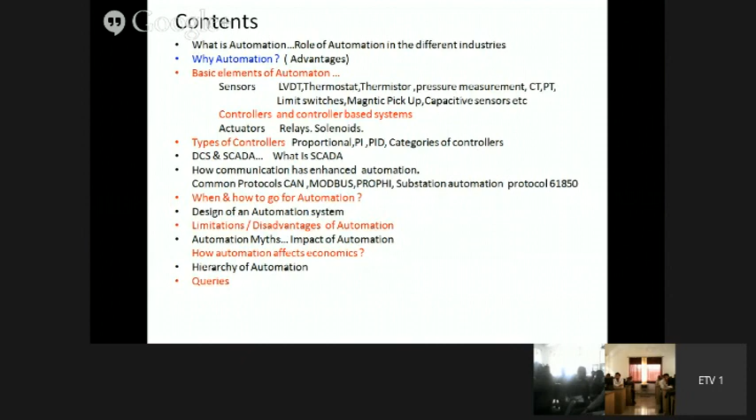Let us elaborate. First of all, I'd like to define what is automation. The dictionary meaning defines automation as the technique of making an apparatus, a process or a system operate automatically. When there is a system or process and it works automatically, we say it is automation.

The American system of definition - the Automation Federation defines automation as the creation and application of technology to monitor and control the production and delivery of products and services. This is the Automation Federation of America's definition.

Automation means use of available technologies to reduce the need of human efforts. Automation is a step beyond mechanization - not mechanization, but a step beyond it. Mechanization provides human operators machinery to assist them with the muscular requirements of work, while automation greatly decreases the need for human sensory and mental requirements as well. So this is, in a nutshell, the definition of automation.

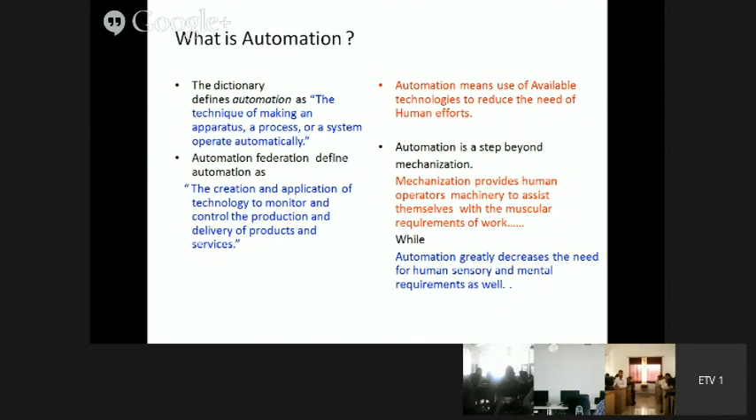So this is automation. Suppose the plant is not automated, if you want to increase productivity and quality, manpower also has to be increased. But in automation, quality and productivity will increase while manpower cost decreases. This is, in a nutshell, automation and its objectives.

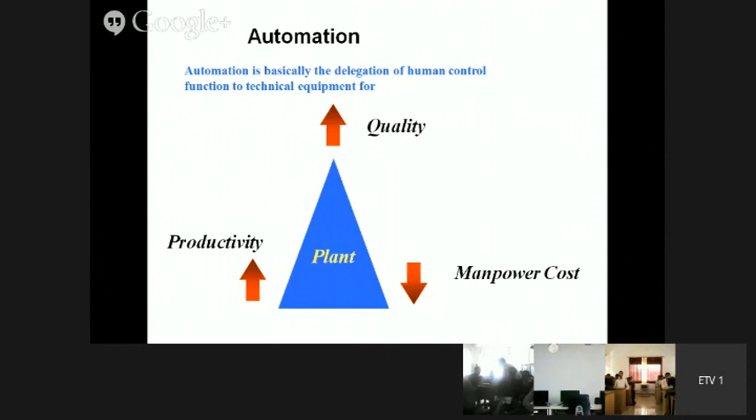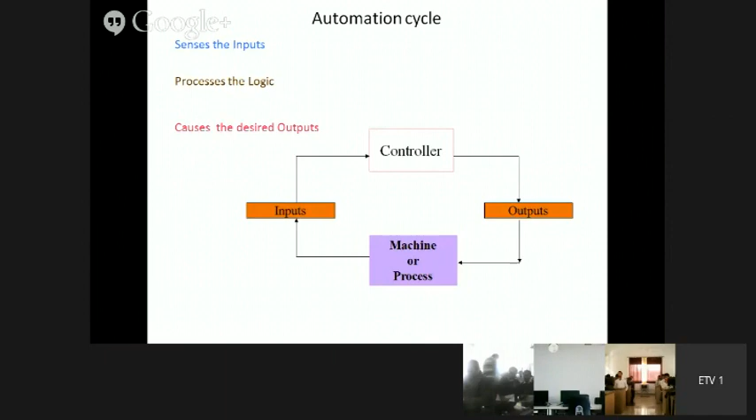Let us see a little bit of history of automation: the ancient world versus the modern world. Of course, you can coin your own words, but to some extent I have tried to put them in order to show what automation history was in the ancient world and how the modern world has taken automation into its application.

In the ancient world, we have manual control, pneumatic control, hard-wired logic control, electronic control using logic gates, process instrumentation, etc.

But in modern control, which is nothing but automation, we have programmable logic controllers, microcontroller-based embedded controllers, clusters of controllers, master controllers at remote locations, and intelligent instrumentation. This is, in a nutshell, the history given for automation.

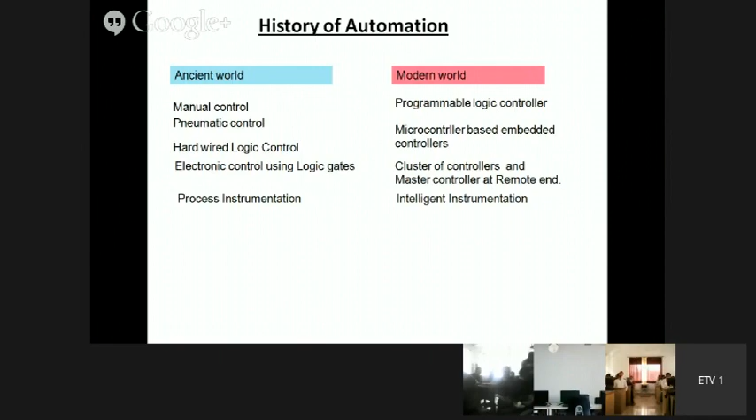We have now entered the 21st century, out of which the last 20 years belong to the communication and information era. This is a very important point, because in the last 20 years we have been working very intensively in the field of communication and information.

If you look at the ancient world, what are the examples? There are inventions that go back to the ancient world, and then came the discoveries of various metals.

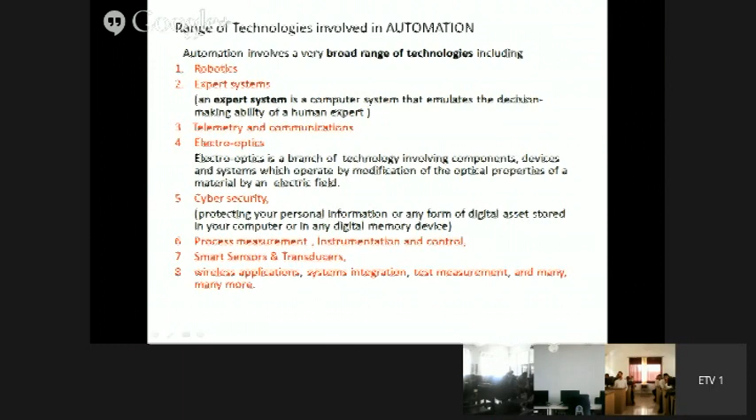Application of automation. Automation encompasses many vital elements, systems, and job functions: manufacturing, transportation, utilities, defense, facility operations, etc., and many others. So these are some of the applications of automation.

Automation can be said to be everywhere. It is present everywhere now, in all functions and places.

We have aerospace, automotive, chemical and petroleum, computer technology, construction and design, electro-optics, environmental, food and pharmaceuticals, glass and ceramics, management, marketing and sales, mining and metals, nuclear, power distribution, process measurement and control, pulp and paper, robots and expert systems, safety, sensor technology, systems integration, telemetry and communications, test measurement, textiles, water and wastewater, and wireless applications.

I don't think any sphere is left in the field of automation. It has touched every sphere of this world and has come into almost every day-to-day life. So we can see the significance and importance of automation.

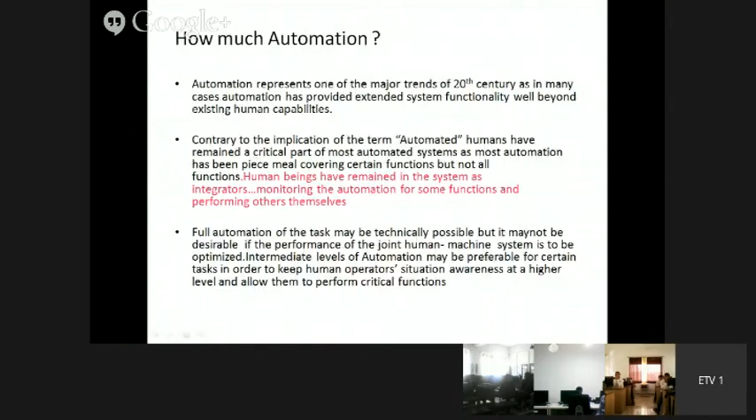Contrary to the implication of the term automated, humans have remained a critical part of most automated systems, as most automation has been piecemeal, covering certain functions but not all. Human beings have remained in the system as integrators, monitoring automation for some functions and performing others themselves.

Here I would like to quote an example of automation in medical sciences, and the latest one is surgery. Now you have robots carrying out very critical and complex surgeries like brain surgery, heart surgery, bypass, etc., and they are doing it very efficiently also.

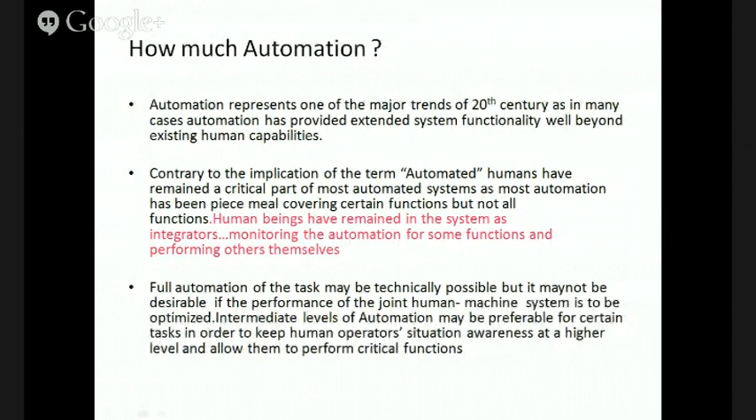But even then, a robot may be costing crores of rupees to perform that operation. A team of doctors still need to be there, because it's a very critical operation being carried out by a robot. So there is always a team of doctors who monitor what is happening. This is one example.

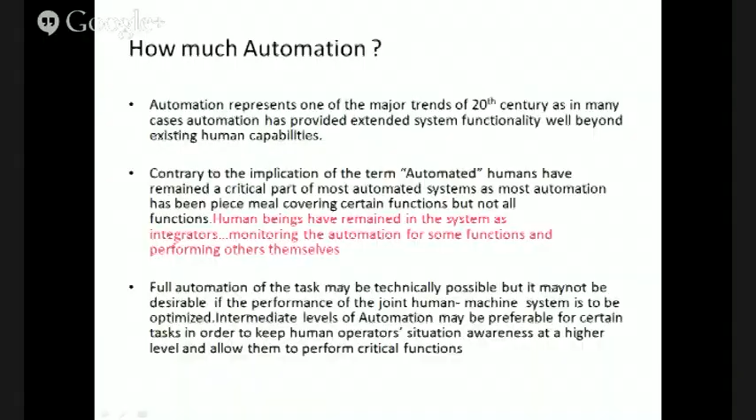Then there is another example - robots have also done wonders in the area of automobiles. Take the example of our Indian Maruti. I have personally visited Maruti Udyog in Gurgaon, where they use robots that can perform 8 to 10 operations simultaneously, one by one, in a total automatic process.

And in their unit in Japan, they can change the head also, and do some different processes. So this is the level of automation which has come into the picture.

Full automation of the work task may be technically possible, but it may not be desirable if the performance of the joint human-machine system is to be optimized. Intermediate levels of automation may be preferable for certain tasks, in order to keep human operators' situation awareness at a higher level and allow them to perform critical functions. It's the same as the example I gave of surgery being carried out by a robot.

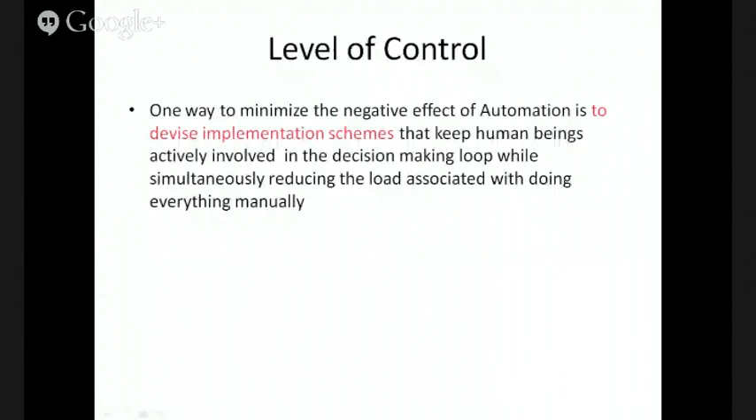Level of control: one way to minimize the negative effect of automation is to devise implementation schemes that keep human beings actively involved in the decision-making loop, while simultaneously reducing the load associated with doing everything manually. Whenever you have the human touch in it, implementation schemes will definitely improve the automation system, while still retaining that human touch.

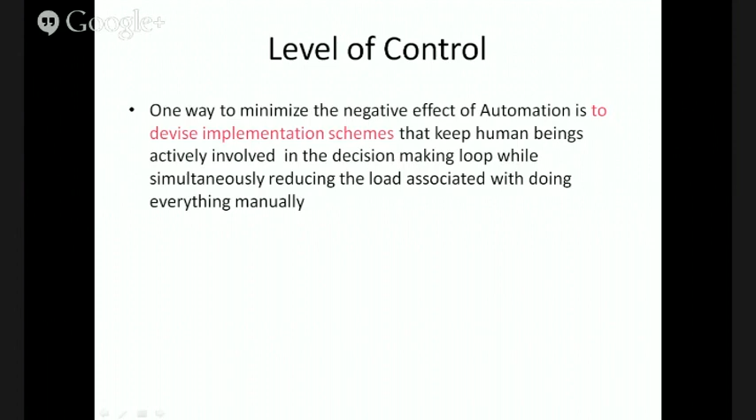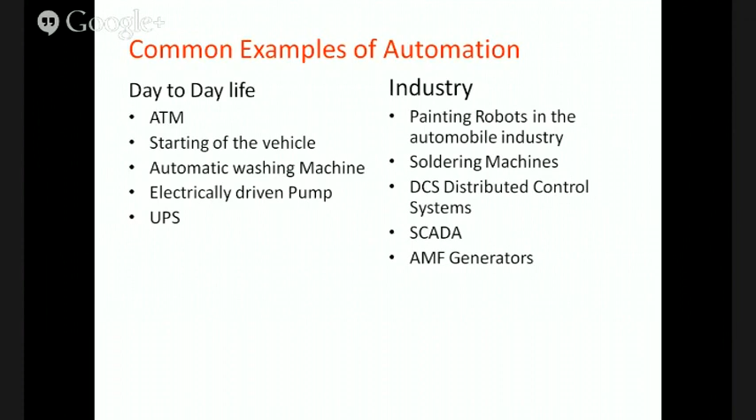In industry: painting robots in the automobile industry, soldering machines, DCS distributed control systems, SCADA, and AMF generators. These are examples I would like to give here. Then, technology is involved in the working of an ATM.

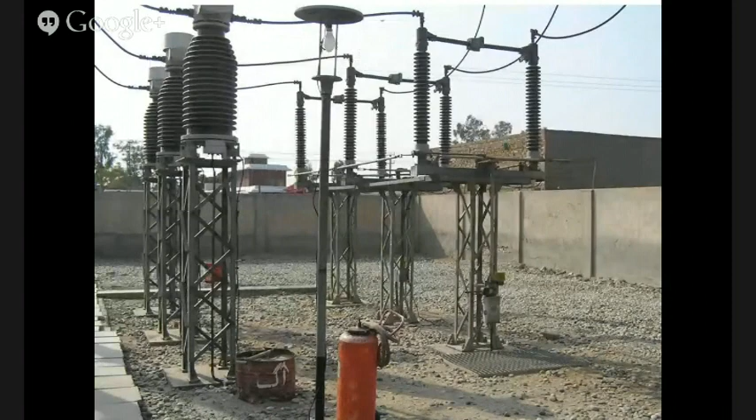Potential transformer, again like CT, you also have potential transformers, measured for having the potential difference, having many primary turns but few secondary turns. In step down, the voltage decreases and current increases.

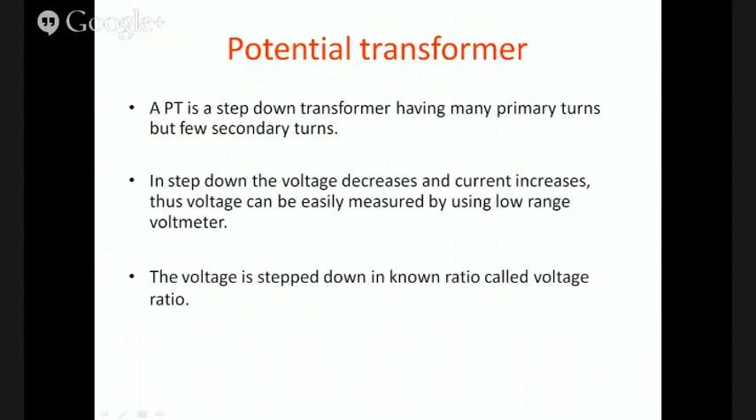Thus voltage can be easily measured by using a low range voltmeter. The voltage is stepped down in a known ratio called the voltage ratio. The construction of a PT is slightly different than a CT, because here the objective is to measure the potential difference, so the transformation ratio is V2 by V1. There it was I1 by I2.

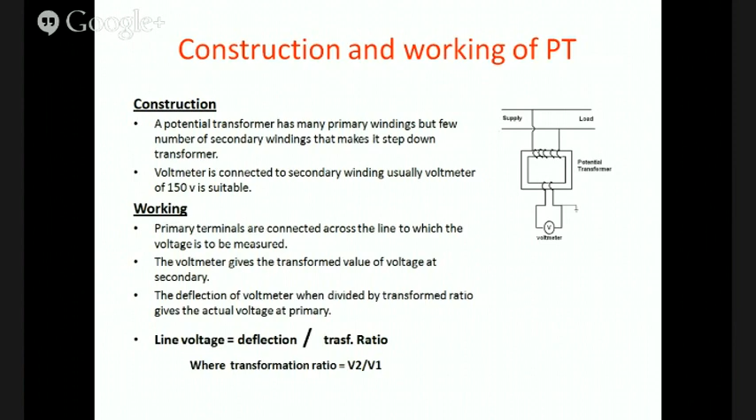Precautions for CT and PT: what are the precautions? Utmost care should be taken to ensure that the CT secondary is never open - this is a very important thing. For safety purposes, the secondary should be completely insulated from the high voltage primary, and should also be grounded, with more than one ground. This is a very big precaution for CT and PT.

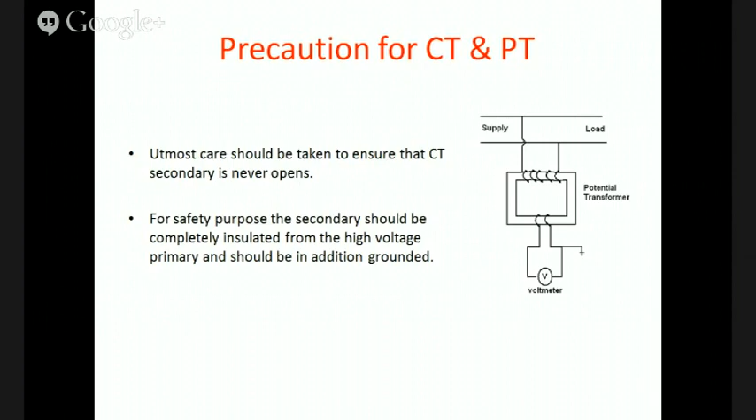Automation has always been a very important thing so far as electricity is concerned. In the near future, home automation systems may be linked to the electricity utility in a number of ways.

Householders can program appliances to reduce power or switch off altogether during high price periods. There are different switches wherein you can switch off your gadget when there is a high price. You know that tariffs are different - sometimes high, sometimes low, sometimes flat.

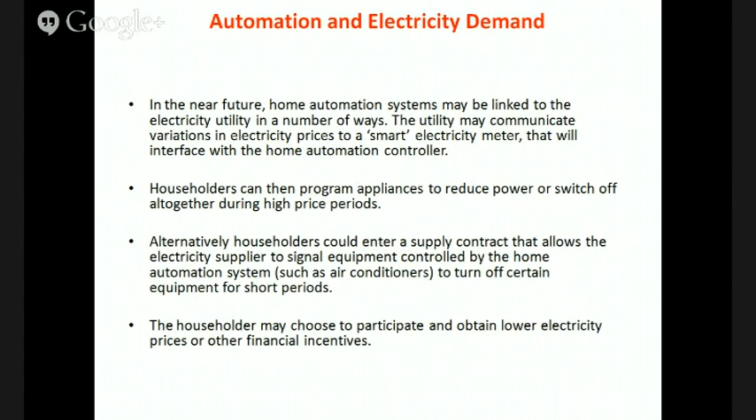Alternatively, householders would enter a supply contract that allows the electricity supplier to signal equipment controlled by the home automation system, such as air conditioner, to turn off certain equipment for short periods. AC is one of the gadgets in your house which consumes a lot of electricity, so if you have a scheme like that, you can switch it off accordingly and reduce your electricity consumption quite a lot. The householder may choose to participate and obtain lower electricity prices or other financial incentives.

Now, desirable sensor attributes. What are the attributes of a sensor? One is reliability, then accuracy and repeatability. Accuracy is different, repeatability is different - I hope you understand the difference between accuracy and preciseness. Also good response time, withstanding capability, long life, and low hysteresis. These are the desired attributes of a sensor.

Now, there is a word called transducer, and there is a very common word called sensor, but there is a difference between the two. The sensor senses a physical quantity in the same form - suppose heat is to be sensed, it will sense the temperature in degree Celsius or degree Fahrenheit. That is a sensor, like a thermometer, tachometer, odometer, etc.

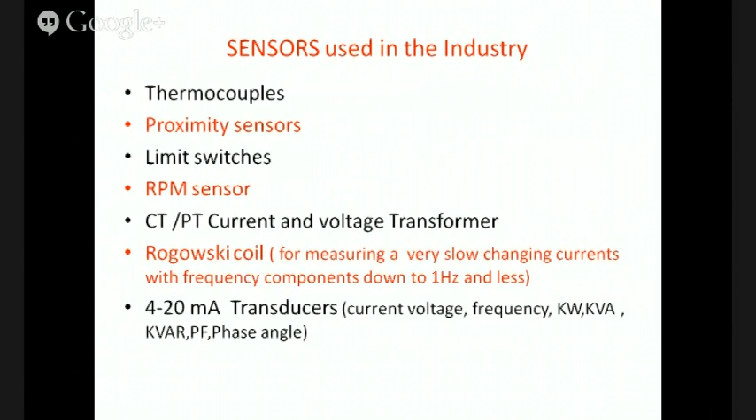Basic elements of automation - there are controllers. Now, what is a controller? Let us see. A controller is a device which monitors and implements the required changes in the operational conditions of a given system.

A controller is a transfer element which compares the feedback value received from the transducer sensor to a predetermined value, that is the set point, and processes it in such a way that a control signal is transmitted in the form of an appropriate variable to the actuating element.

Anything which is controllable must be measurable and comparable - this is very important. Nothing can be controllable if it is not measured, if it is not compared. So anything which is controllable must be measurable and comparable.

A comparator compares a given value with a set value - there is a set value or reference value, whatever you may call it, and you compare it with that value and determine this is the standard value or this is the comparison, this is the value which is required. The symbol shows what the error is, how much is required, how much is to be implemented, and so on.

The simplest controller is an op-amp comparator - that's the simplest form. Of course, the simplest form of this controller is an on-off switch, and the op-amp is the device which is supposed to be the simplest comparator.

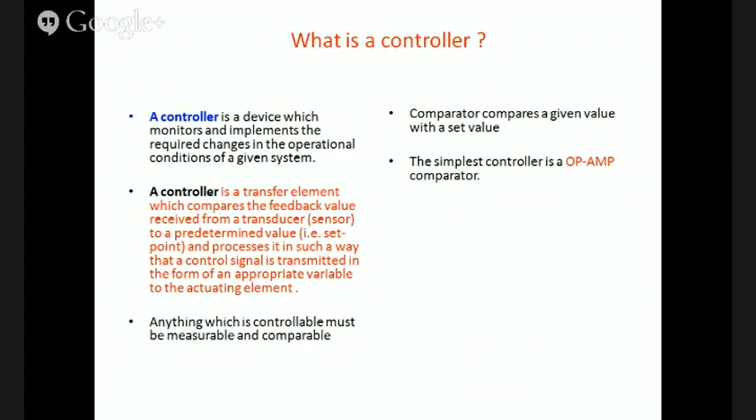A device which accepts inputs, measures them, and depending on predetermined conditions, actuates one or more devices is called a controller. These are the certain definitions of controller.

The input signal representing a physical quantity can be digital or analog in nature. In an automation form, the sensor output is to be converted into electrical form by signal conditioners and amplifiers before it is processed by the controller. It is a must. Why? Because anything in the automation system, we are finally going to play with the signal, and that has to be compared in the form of an electrical signal. That's why conversion of any quantity into an electrical signal is a must, and that's why transducers are much used.

If the automation is analog, then a suitable ADC is used to enable the controller to read it. Of course, nowadays digital controllers are there, wherein we have to change it into digital form using ADCs. But finally, when the control element is to execute the actual function, it does not recognize the digital signal. It has to be further converted into an analog signal using a D2A converter, that is a DAC.

Programmable automation controllers combine the capabilities of a PC, this computer, and a control system. That's why it is known as PAC. It is a compact controller that combines the features and capabilities of a PC-based control system with that of a typical programmable logic controller, PLC. If you combine it, it becomes PAC, Programmable Automation Controller.

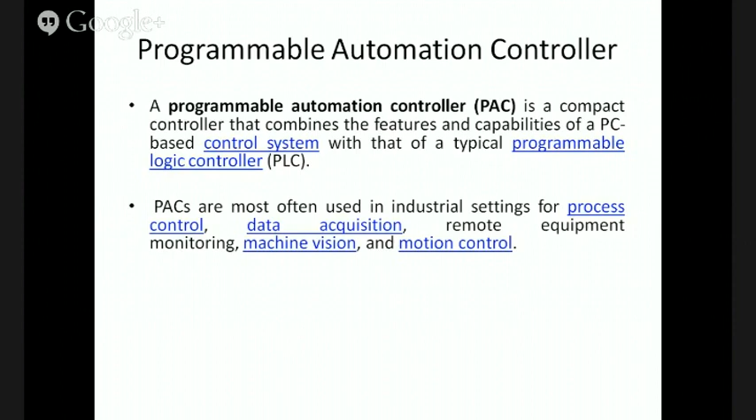Types of controllers. Controllers can be categorized based on the parameter or physical quantity they are controlling. Examples are temperature controller, RPM controller, pressure controller, etc. The second category is based on the manner in which they control the physical quantity: proportional controller P, proportional integral controller PI, proportional integral derivative controller PID, and on-off, which is also known as bang-bang.

We all know that the simplest form of a controller is the P-type controller, then comes the PI type, and the most complicated is the PID type, wherein a derivative is also introduced.

Analog or digital controllers, and then lastly, the device used for controlling: PLC, PC computer, digital circuits, which I said is PAC.

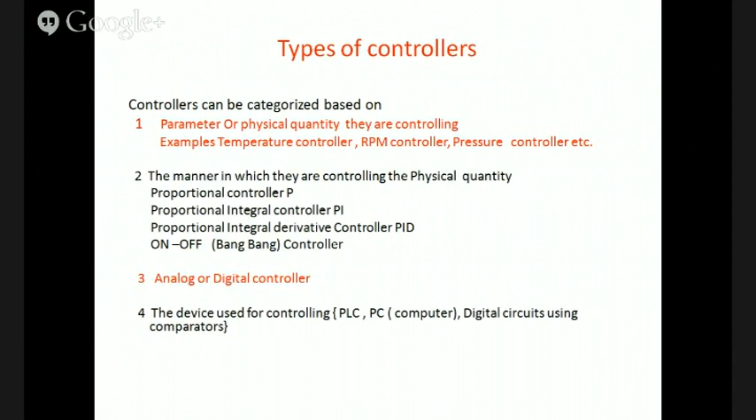Controllers are essentially small, purpose-built computers with input and output capabilities. These controllers come in a range of sizes and capabilities to control devices commonly found in buildings and to control sub-networks of controllers. Inputs allow a controller to read temperatures, humidity, pressure, current flow, airflow, and other essential factors. The outputs allow the controller to send command and control signals to slave devices and other parts of the system. Inputs and outputs can be either digital or analog in nature.

Now comes microprocessors and the world of microprocessors and microcontrollers. Microprocessors are these days being replaced by microcontrollers, so we'll not talk much about microprocessors, but about microcontrollers. A little bit of microprocessors, of course.

Selection criteria for controllers: speed, memory, input-output handling capability, communication capability, and built-in features such as built-in ADC and built-in DAC.

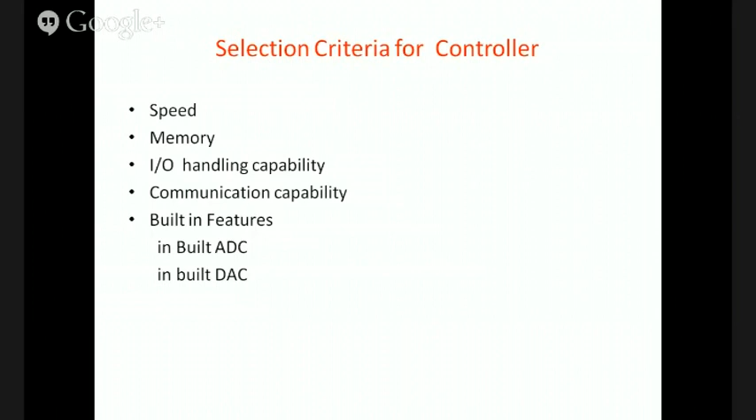A little bit of programming of microprocessors, because you have this world in front of you. A controller chip without software loaded in it has little power to control, because if you don't have the software, if you just have the hardware, it will not do any good. So you have to have the backup software.

A controller understands only zeros and ones. It can only distinguish two levels, high and low. The lowest level language is machine language, which has only two characters. The Morse code is perhaps the best example of machine language.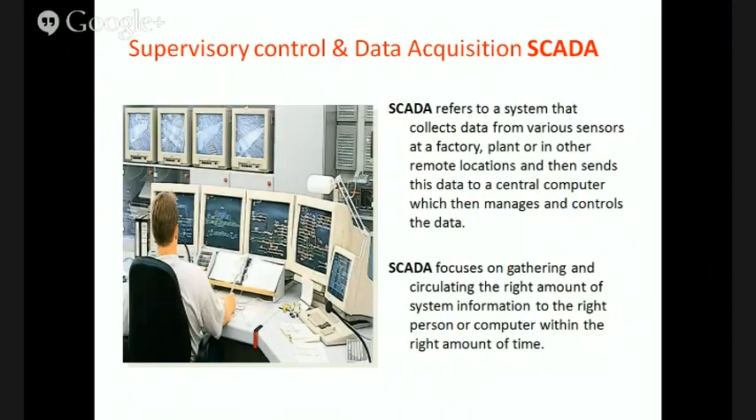For example, one of the best applications of SCADA is in thermal power generation, where you have a lot of controls, loops, and monitoring, which used to be done in one place only earlier, wired, but now fully wireless SCADA is available. You also have it in cement factories and a lot of manufacturing industries, all using SCADA at a very large level.

There is another term called DCS, distributed control system. If you compare DCS and SCADA, DCS is a very broad term used in a variety of industries to monitor and control distributed equipment. SCADA is an acronym for supervisory control and data acquisition. SCADA systems perform data collection and control at the supervisory level. Some systems labeled as SCADA perform data acquisition only. A SCADA system should not be critical to the controlled process.

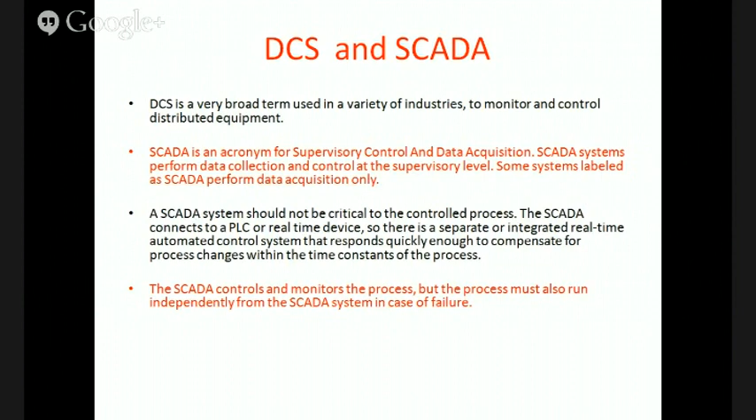The SCADA concept connects to a PLC or real-time device. There is a separate or integrated real-time automated control system that responds quickly enough to compensate for process changes within the time constants of the process. SCADA controls and monitors the process, but the process must also run independently from the SCADA system in case of failure. If there is a failure, it should not wait for the SCADA; it should run automatically and in its own way. That is the beauty of SCADA.

Features of SCADA: what are the real features of SCADA? Important features of typical SCADA software include dynamic process graphics, real-time and historical trending, alarms, recipe management, security, device connectivity, and database connectivity.

Role of communication in automation. I was telling you earlier that communication has played a very significant role in the field of automation. Let us see what role it plays. Communication has played a vital role in the process of automation.

The controllers receive input from the various sensors and also receive input from the communication bus. So there have to be a lot of protocols involved in communication. Master control is usually at the centralized location, and it must receive data from all the locations to enable it to process the inputs and reach a decision.

If it is centralized, then only it will receive all the inputs at a time at one place, and then it will process it to get the required output.

Different protocols are used to transfer the data to the controller. A lot of protocols are being used for communication. What are the different protocols? IEEE instrumentation bus, CAN bus, Modbus, Profibus, 61850 protocol, TCP IP. These are the commonly used and very popularly known protocols which are practiced in industrial automation.

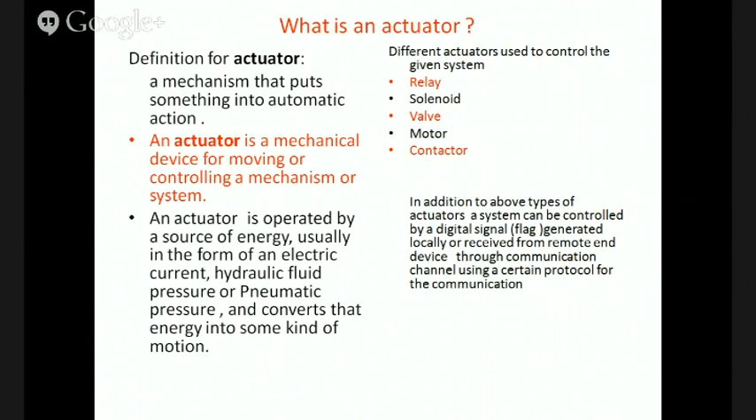Actuators can be categorized. How do you categorize? Number one, energy source based, and number two, type of motion. If you see the energy source based, then electrically operated actuator, pneumatically operated actuator, hydraulically operated, and sometimes gas operated also. These are the types of energy source based actuators. And from the type of motion point of view, you have linear motion, rotary motion, oscillatory motion, etc.

This is the most common type of actuator, powered by air. The pneumatic cylinders are also known as air cylinders. Air cylinders are airtight cylinders typically made from metal that use the stored energy of compressed air to move a piston when the air is released or uncompressed. They are most commonly used in manufacturing and assembly processes. These are the air cylinders, known as pneumatic actuators.

Grippers, which are used in robots, use actuators that are driven by compressed air to work much like a human finger.

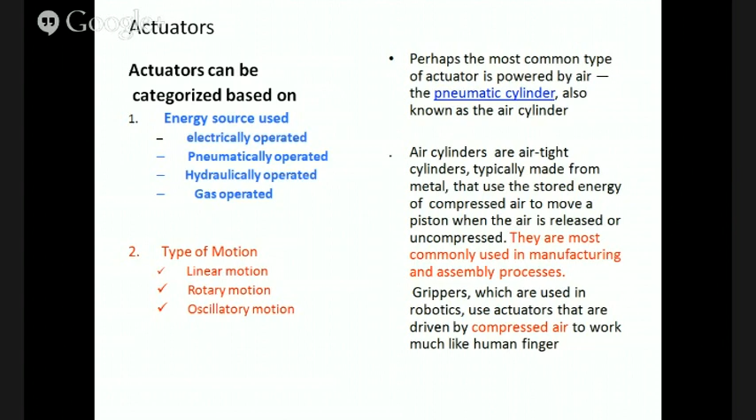A relay is an electromechanical device, and it has a pre-designed operating voltage. Whenever that voltage is given, current is passed through it, and it becomes electromagnetic and starts working. Essentially, it has a coil, a plunger, a spring, and at least one pair of contacts for operations. The coil gets energized, and the electromagnetic action as a result of current flow in the coil attracts the plunger, resulting in the change of contact positions. It attracts, the plunger gets attracted, and naturally it breaks or opens.

It either breaks or it closes. So that is a change of contact position. Contacts are designed to carry large current compared to the operating current of the coil. Contact material can withstand several thousands of operations. If it is unable to withstand that, then it will get pitted and its life gets limited. That's why it has been designed in such a fashion that it can withstand several thousand operations, make and break, nothing but make and break operations.

The relays are available in different types: sealed and unsealed, latching, non-latching, AC and DC operating. The contacts available in relays are NO and NC, that is normally open type contact and normally closed type. If it is a normally closed type contact, when you energize it, it becomes open. On the other hand, if it is an NO type, that is normally open type, when current starts flowing and it is energized, then it becomes closed.

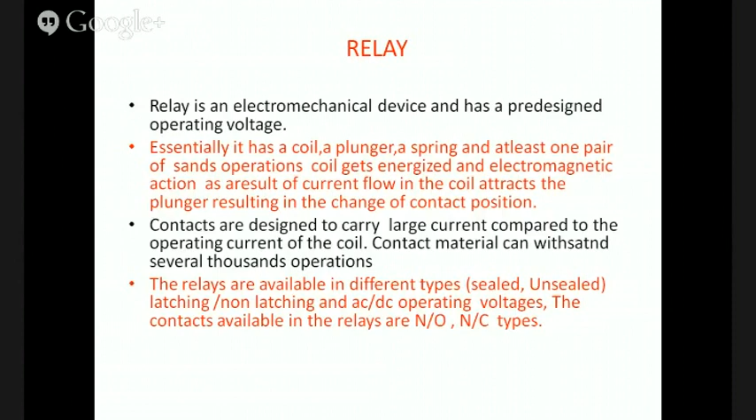Relays versus contactors. How do you compare the two?

Contactor again works on the same principle. However, contactor has two types of contacts: main contacts and auxiliary contacts. Auxiliary contacts are used to give the status to the controller, while main contacts carry the controlled current. This is the difference. Contactors are available in different sizes depending on the current carrying capability of the main contacts.

Solenoid also operates on the principle of electromagnetism, like relay. However, in addition to changing the status of the contacts, solenoid plunger movement also initiates mechanical movement, leading to change in the positions of other mechanical components to control the pneumatic, hydraulic or electrical circuits.

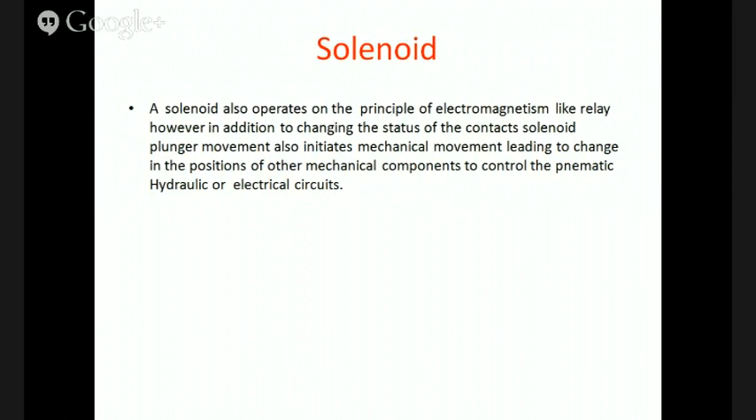Now there are stepper motors. You must have seen stepper motors, and one of the most important applications of stepper motor is your printer. Used in measured rotation, it can be held at a particular position of the shaft. Ideal for many automation robots requiring higher precision, etc.

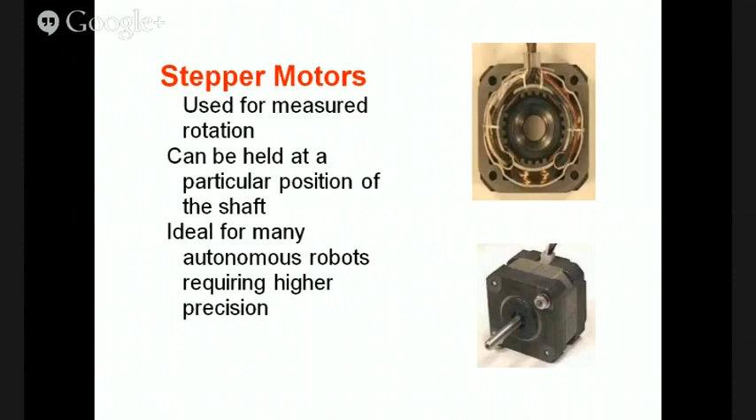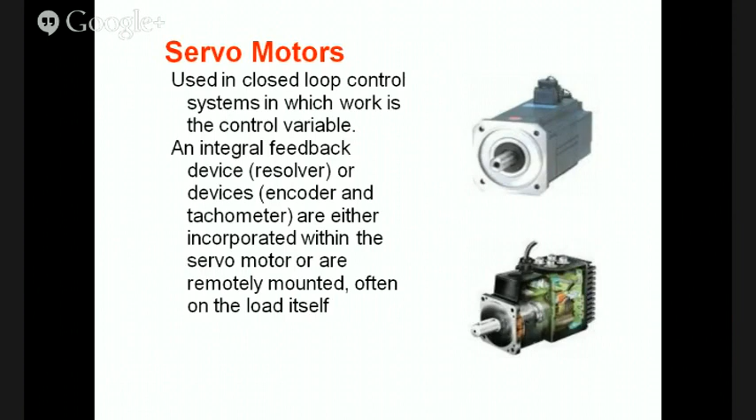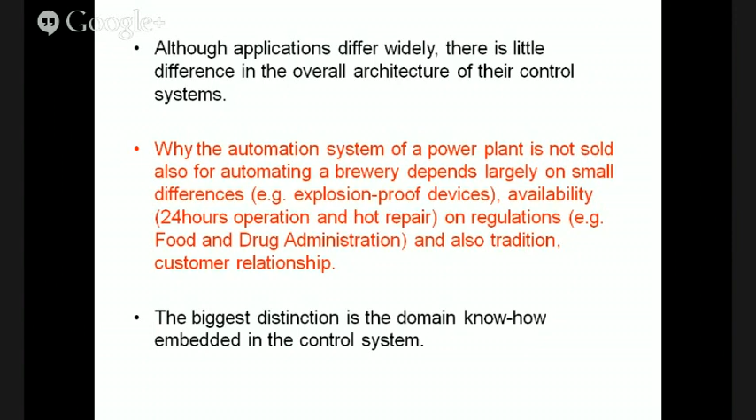Then comes the workflow, order tracking, resources, which is manufacturing execution, MES. This is the third level. The second level was supervisory control, where SCADA was the technology applicable, and sometimes DCS is also applied. Then comes the third level, which is workflow, order tracking, resources tracking.

Finally, then comes the fourth level. Fourth level is enterprise: production, planning, orders, purchase, etc. And the word used here is ERP, enterprise resource planning. Finally, the fifth level is known as planning, statistics, and finance. That is the final level of control, and there a word is used called SAP.

Then comes the supervisory control, the SCADA or the DCS. Here we are getting all these signals from the lower level at one central place, wherein we are incorporating SCADA software, which takes all kinds of inputs from there, processes that input, and finally creates and gives the output, which is the controlled or desired output. Then after receiving that output, it goes to workflow, order tracking, and resources.

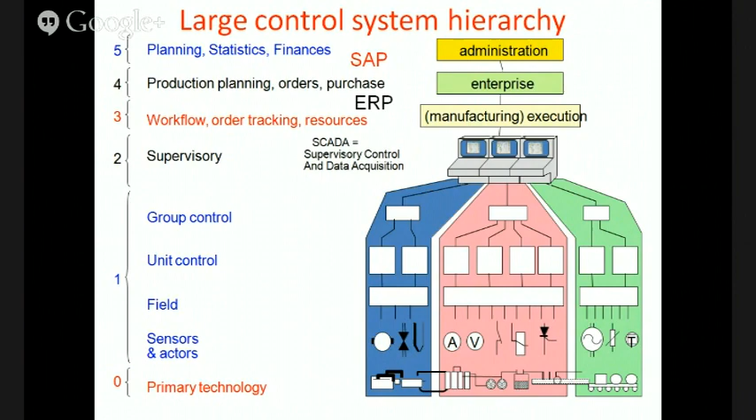Then the large control system hierarchy: the same thing I explained from that figure, administration, enterprise, manufacturing, supervision, group, area, unit, field. From the lower level it goes higher: field, unit, group, area, supervision, manufacturing, enterprise, and administrative.

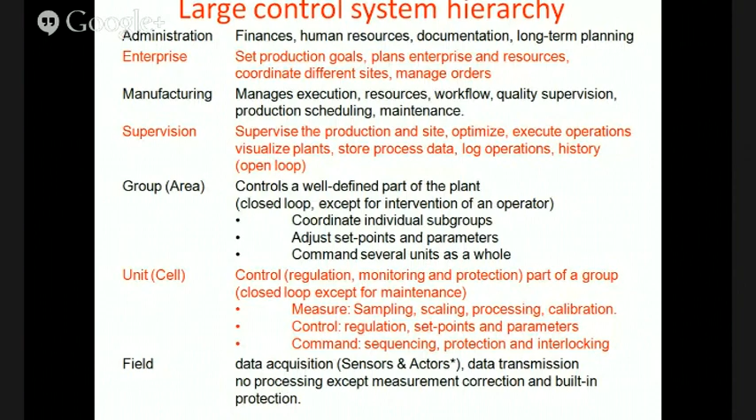This is the field level control, the actual equipment and machinery you can see. This is direct interaction, direct control with the plant's hardware. That is the field level control.

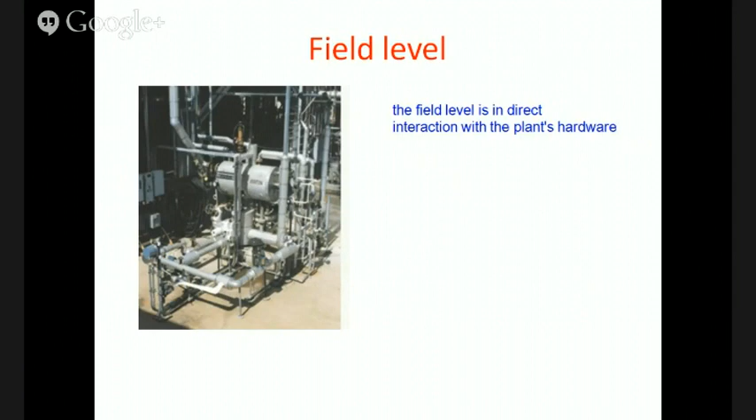Then the group level. Group level means so many hardwares at a time become a group. One hardware was one unit; suppose there are 10, 15, or more units, then you have a group. You may have one group or more than one group, two, three, four, and so on. That becomes group level coordination or group level automation.

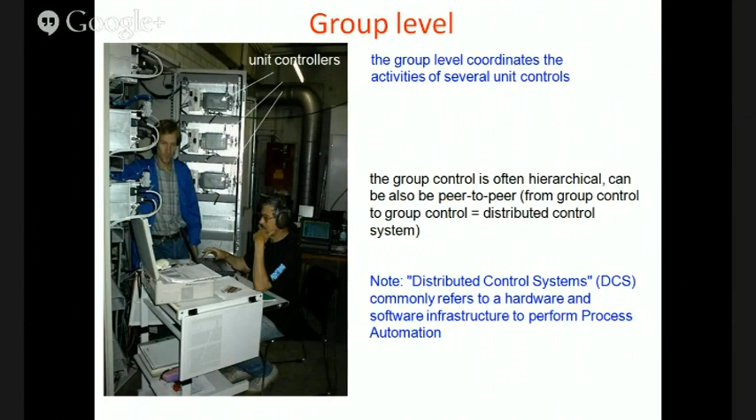This is local human interface. Here HMI comes in, and the group levels are interfaced with a human, taking inputs and outputs and processing them with a bigger computer. That becomes a local human interface, one level higher than before. Sometimes the group level has its own man-machine interface for local operation control.

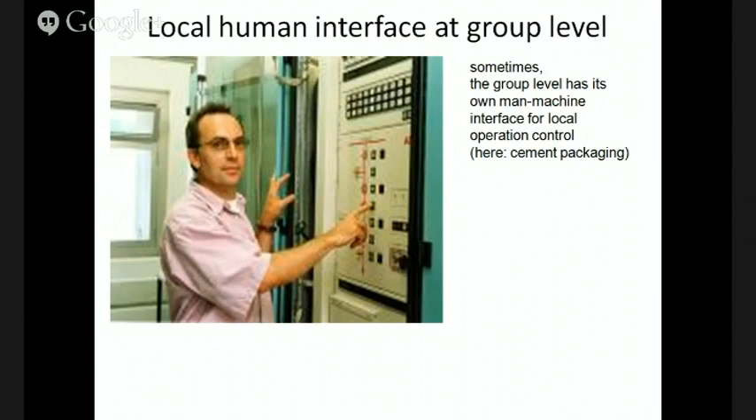Then comes the supervisory level. This is an example of supervisory control man-machine interface, where all the data in the form of different signals comes to this place. Finally this unit is the supervisory level automation of control, wherein human machine interface is key, and all inputs are processed to generate the right kind of outputs, which is a controlled or desired output. This is the third level, the supervisory control. SCADA is used here, or DCS can also be used.

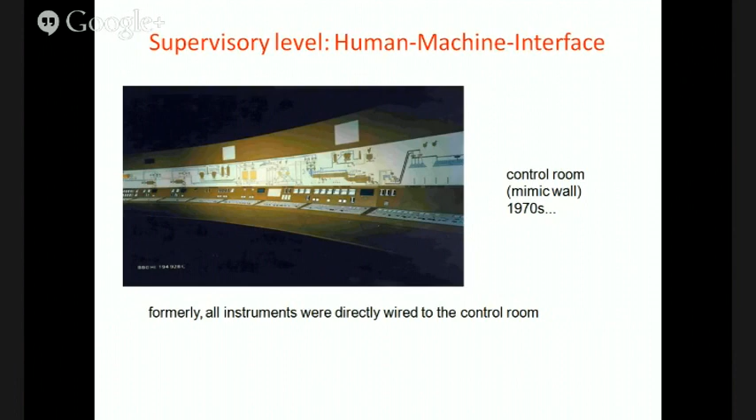Then comes supervisory mosaic interfacing, still in use with direct wiring. Here the difference is that direct wiring is there, but nowadays people are using wireless interfaces. This is known as mosaic interface, used in many places, but one stage ahead is this, known as supervisory mosaic interface, where wiring is available.

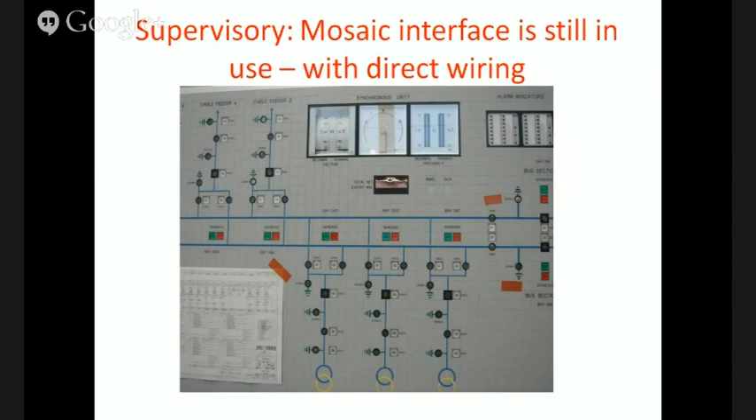Supervisory level SCADA, this is an example. People work here. This can be wired or further wireless. It displays the current states of the process, alarms and events, displays and analyzes trends, and displays handbooks, data sheets, inventory, expert systems, etc. It allows communication and data exchange with other systems.

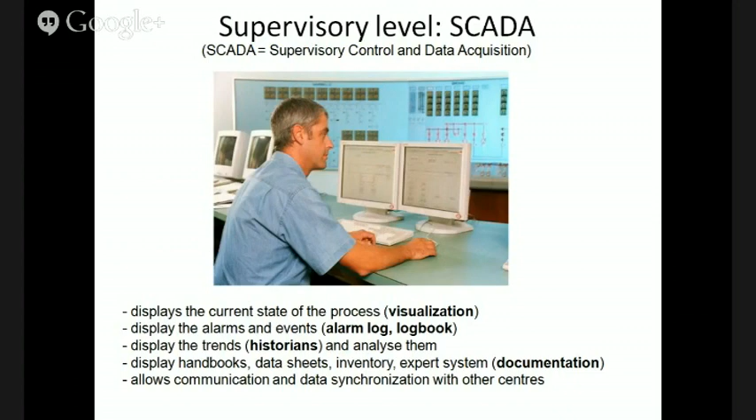Supervisory level. Then comes today's control room. Technology-wise there is a lot of difference, though the principle is the same. Here it is also being monitored and seen on the screen. The main difference is that it is wholly wireless now, whereas earlier it was a wired system.

Projectors replace the mosaics; there's no direct wiring to the plant anymore. It is a mimicry, mimicking the whole functions operated in the plant on the screen, but without any termination of wires. So there is no connection; it is total wireless control, available in front of the people sitting there on the screen. It is also known as mimic control.

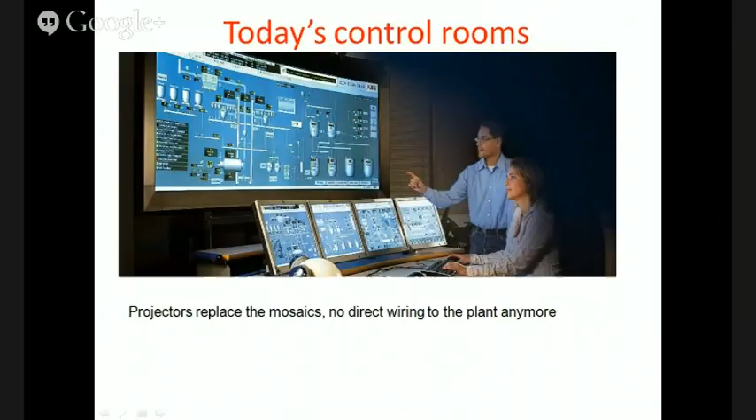Plant management stores the plant and product data for further processing in a secure way, allowing tracking of processes and tracing of products. This is known as the Plant Information Management System, PIMS. It makes predictions on the future behavior of processes, particularly regarding maintenance of equipment. It tracks KPI, key performance indicators, which is very important and must be tracked all the time. And asset optimization - these are things followed significantly in industries nowadays.

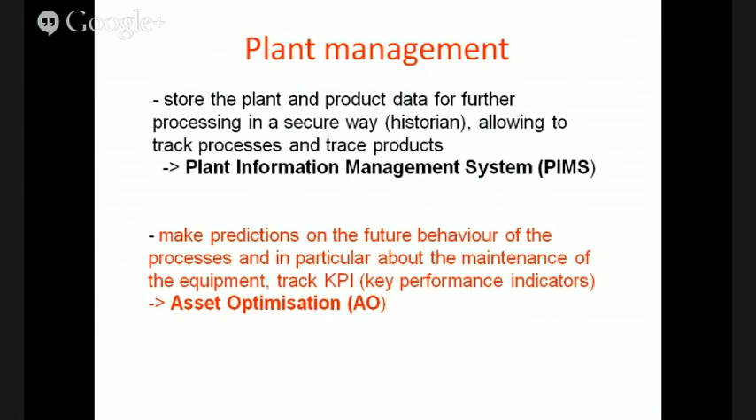Engineering workplace, of course, it looks like this. Managing the control system, not the plant - this is the motto. You manage the control system, you don't manage the plant. The plant has been totally figured, you can say, it has been totally replaced or represented on the screen itself, and you try to manage that.

In other words, managing the control system, not the plant. You don't have to manage the plant, you have to manage the control system. The control system is in front of you, and that too is wireless, and you have to manage that. You don't have to bother for the plant.

Task: configure networks and devices, load softwares, assign access rights, troubleshoot the control system, etc. These are the tasks being done at this level.

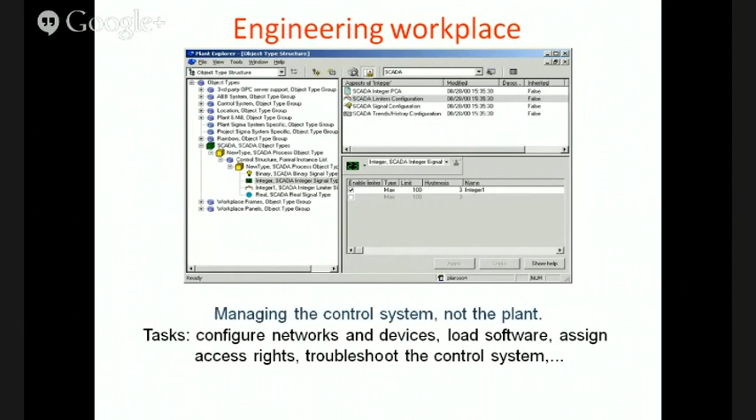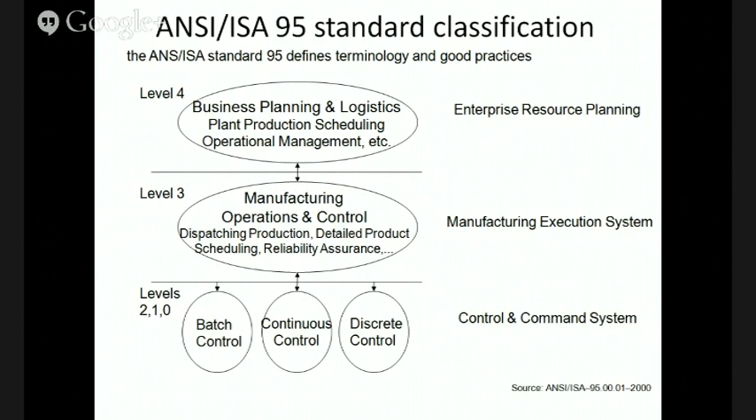So now we can see that automation is at every level. It is not only at the technology level, it is also in the management level, it is also in the administration level, it is also on the decision making level. So that becomes the total automation of an industry, and industry has to follow all these levels to achieve the best possible automation, to achieve the best possible desired outcome.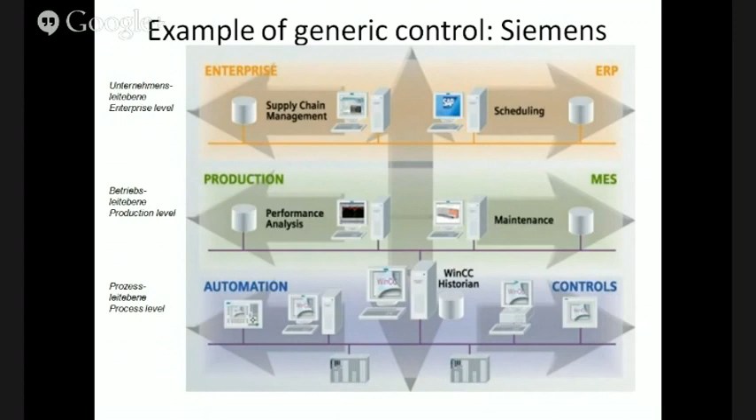Automation cannot be achieved without planning. So this kind of planning is very, very much required at every level, starting from level 0 to level 5.

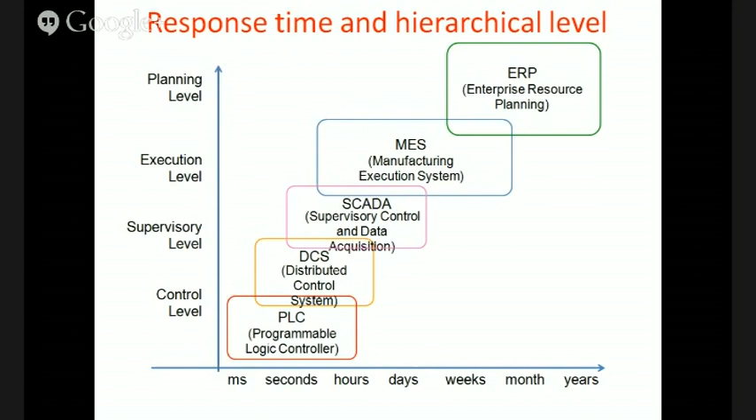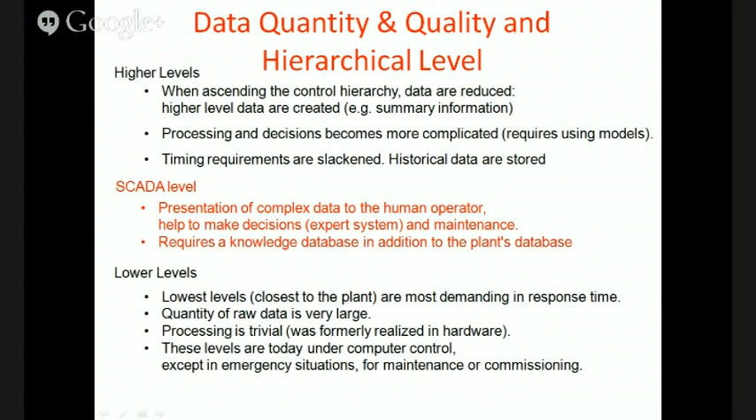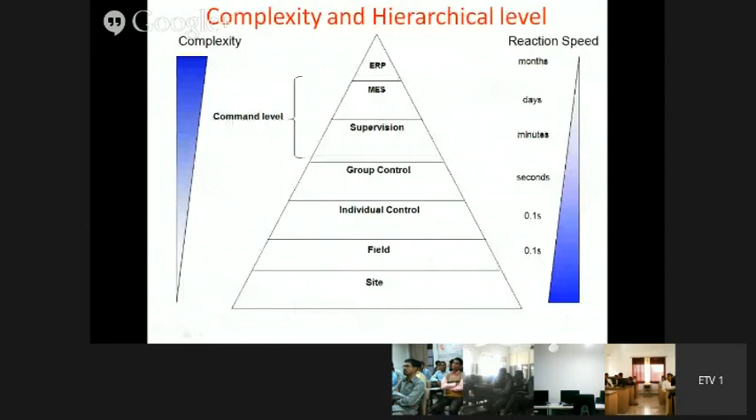So what we can see is site, field, individual control, group control, supervision, MES, and ERP. This is the complexity of hierarchical level. As you go higher and higher in the level of automation, the complexity is zero at this level but maximum at this level.

You can see the complexity is higher at the highest level, whereas the reaction is the least. It is just the reverse. The reaction speed is very, very less at the highest level, in months, days, minutes, seconds. So it will take more than a month to get a reaction, but at the lowest level it may be in milliseconds, as we have seen earlier in the time response.

It may take milliseconds to get a reaction, then 0.1 second, then a few more seconds, then minutes, then days, then months. But the complexity is highest at the highest automation level, while the reaction speed is the lowest.

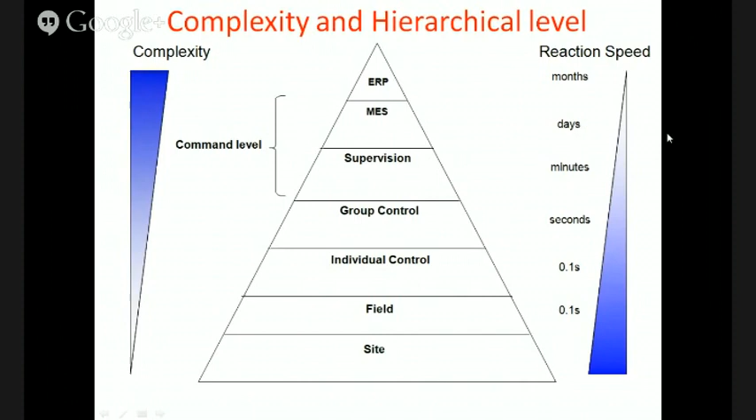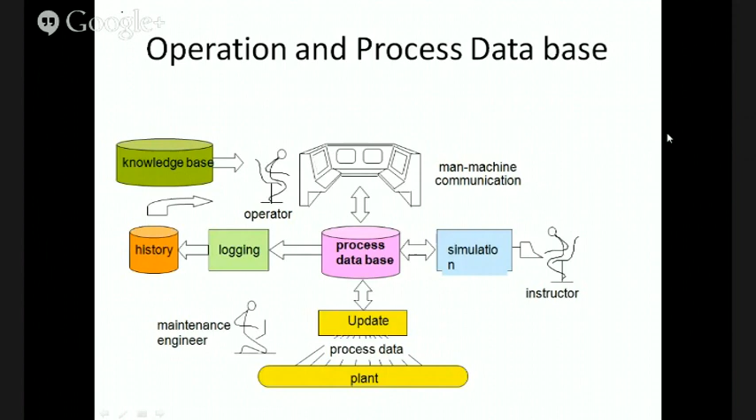Now I think I have given you quite a bit of an idea of what is automation, how automation is required, why automation is required, how much automation is required, what are the merits of automation, what are the demerits of automation, why automation exactly is required, where it is required, how it is required, and what are the levels of automation.